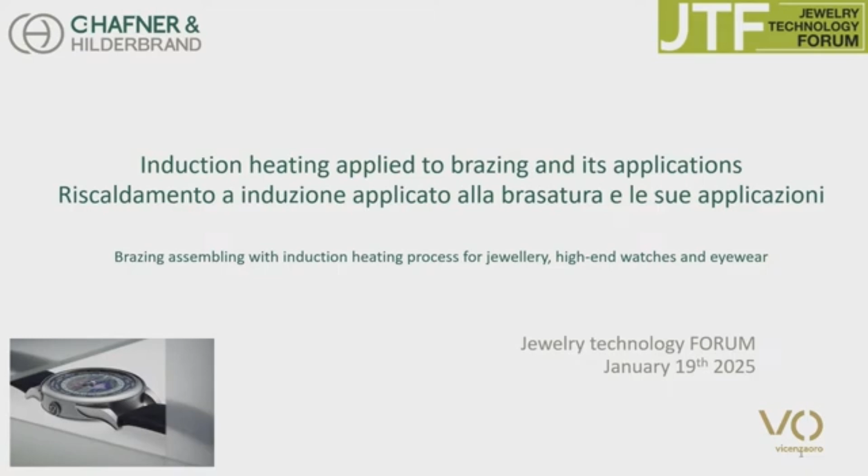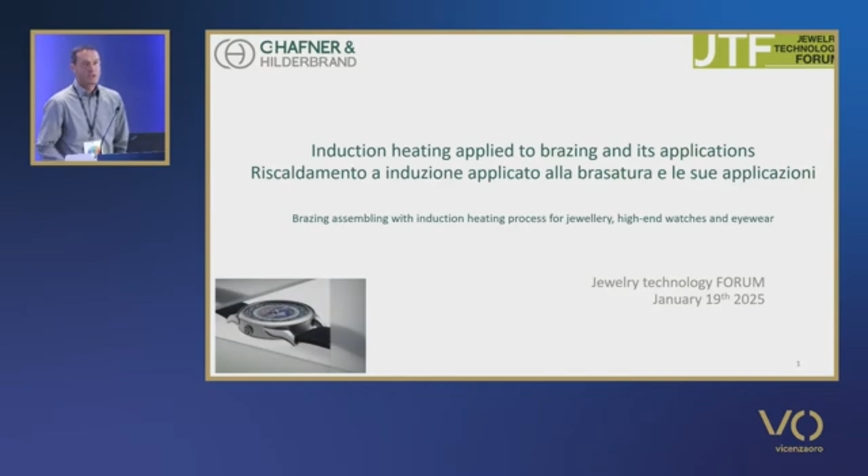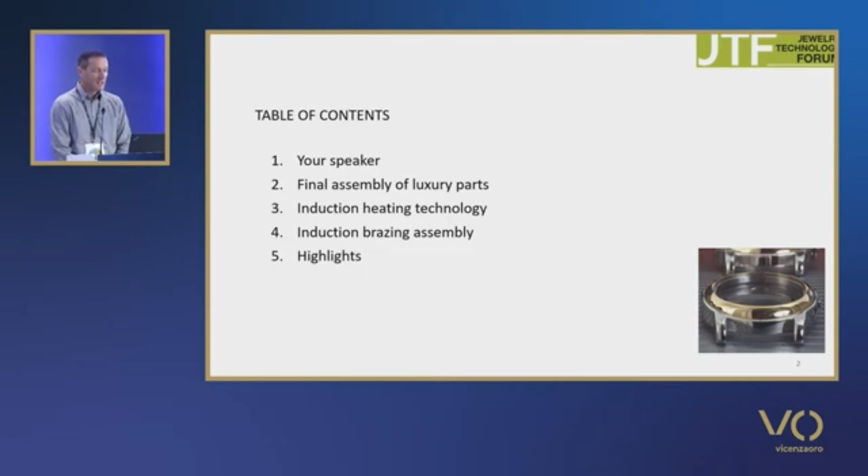Last year, during my previous visit to the fair, I was surprised to see that induction heating is very poorly represented, although it has considerable industrial importance. My presentation is divided into 5 parts. First I introduce myself, then I show you the requirements of final assembly for luxury parts, then I present the induction effect, and finally I merge assembly for luxury parts with the induction effect. At the end, you have to remember the highlights.

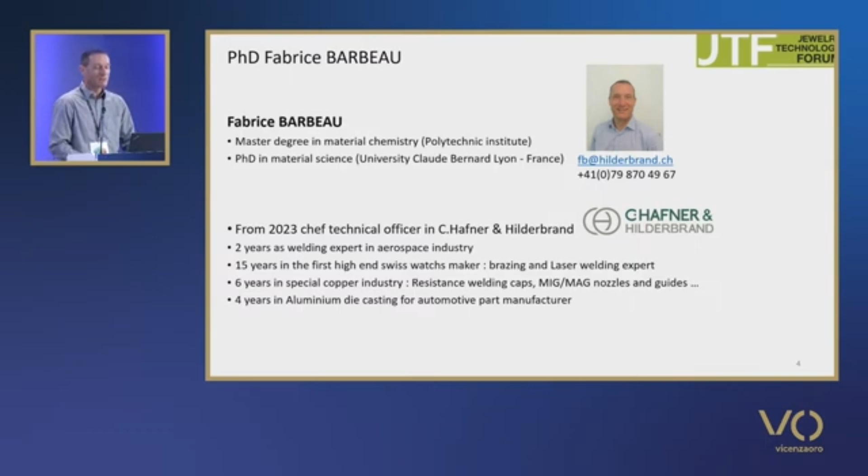So myself first, I just apologize for my lovely French accent. Shortly, I have about 30 years of experience in welding and brazing, including 20 years in the luxury sector.

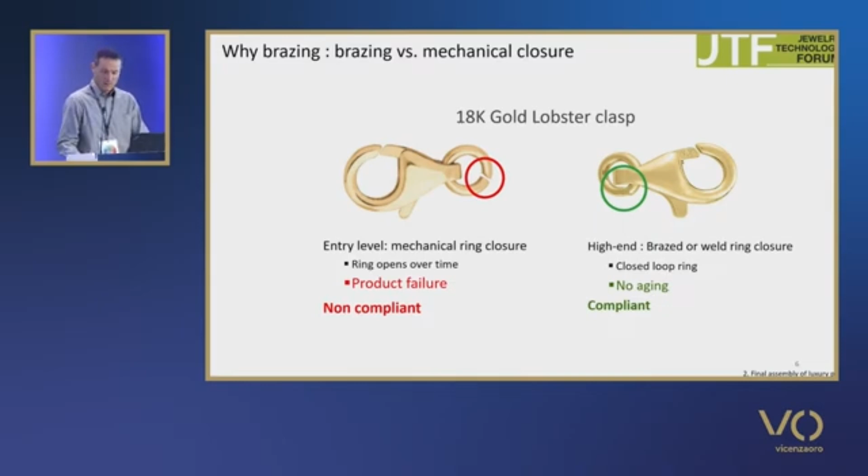There are two ways to create a completely metallic link: brazing and welding. For welding, only laser is compliant with luxury requirements due to small pieces and very high precision. In laser welding, the laser ray melts locally the two different parts and creates a definitive link. For brazing, the key point is to insert a low melting alloy, not too low, and during heating the low melting alloy creates a definitive link for assembling the two components.

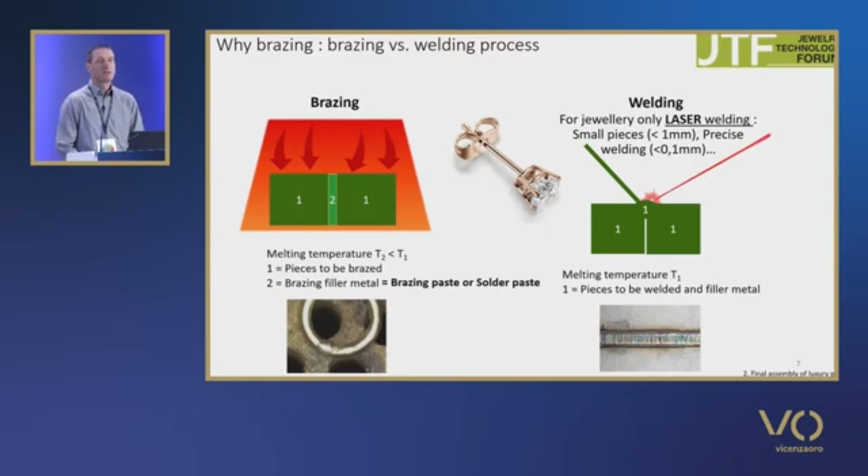I want to insist on the wording. What we have to clarify is, what is it, solder paste or brazing paste? According to the standard, the term soldering, also called soft brazing, must be used for assembling with filler metal at a temperature under 450 degrees. For instance, when using tin-based filler metal for assembling electronic components, it is called soldering, and the filler metal is called solder paste. The term brazing, also called hard brazing, must be used when the assembly is carried out at a temperature above 450 degrees. It is always the case for luxury goods. Subsequently, only the term brazing paste will be used.

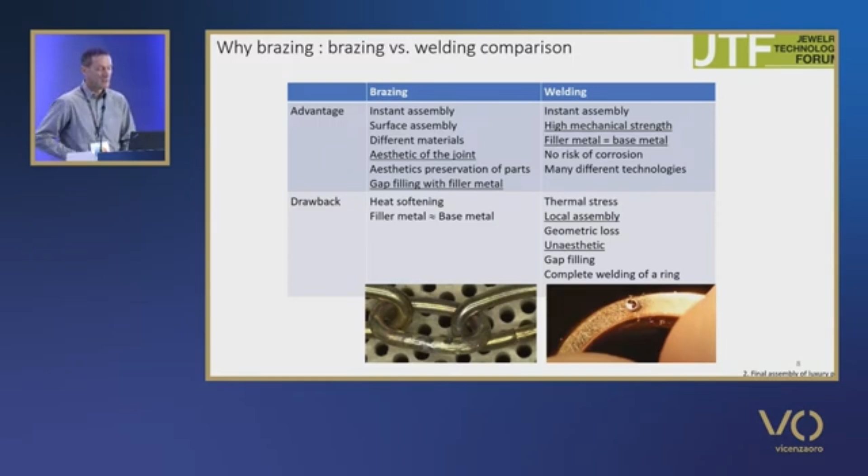Welding is very interesting for very high mechanical strength, and it is possible to use a filler metal with exactly the same composition as the base metal. For brazing, the key point is the aesthetic of the joint. So welding involves very, very local heating, and thus has an affected zone. Welding is very interesting for repairing. Brazing, with its very high quality and the possibility to braze the finished part, is perfect for first production.

Looking at the brazing overall process, there are some subsequent operations: machining, deburring, washing, and you have to pre-assemble the components and dose the filler metal. The heating process of brazing can be performed by a furnace, torch, or induction. The next steps are finishing, grinding, and so on.

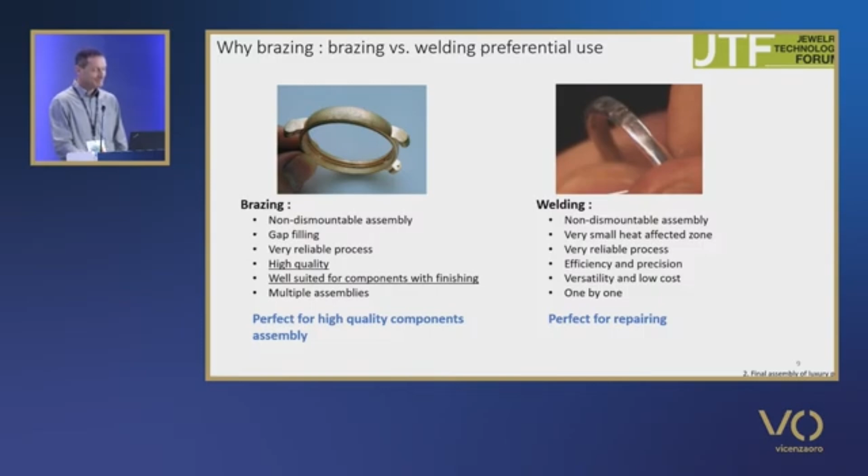The brazing filler metal requirements.

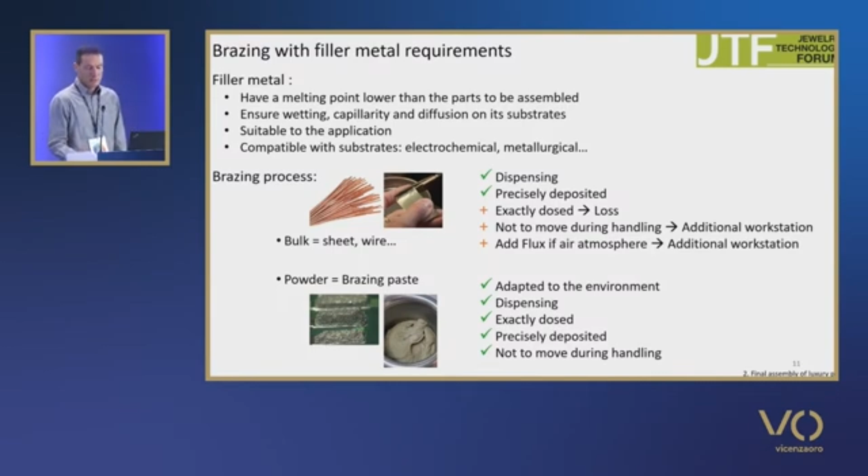The key points for filler metal are melting point, which should be as high as possible, but not too close to the component's melting point, and suitability to the application, meaning the right metal fineness, for example 18 karat gold, the right color or the closest color possible, and the mechanical requirement for luxury goods.

What is brazing paste? A brazing paste is a mix of a flux, a binder, and a powder metal. The flux has a first shielding effect on the components, and when it completely melts, it creates a deoxidation in order to protect the filler metal. The binder allows the powder to be packaged and dispensed. So brazing paste is an all-in-one, ready-to-use product.

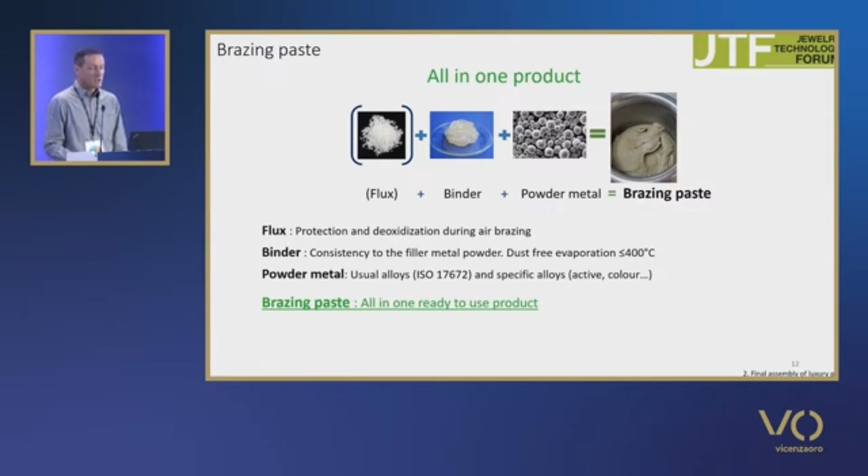Some key points about the brazing paste. First, I insist on the color. On the right, you can see the CIELAB diagram that presents the three basic colors in a board. As you can see, 4N and 5N, pink and red golds, are on the right, and traditional alloy, used in bulk way, is quite far from the real color.

A key point with brazing paste is that you can create a very fine alloy that is very close to the regular color of 4N and 5N. For the Hilderbrand binder, it contains no water, so it's not drying. The brazing paste is compatible with main heating processes, such as induction or torch, and brazing paste is very easy to dispense.

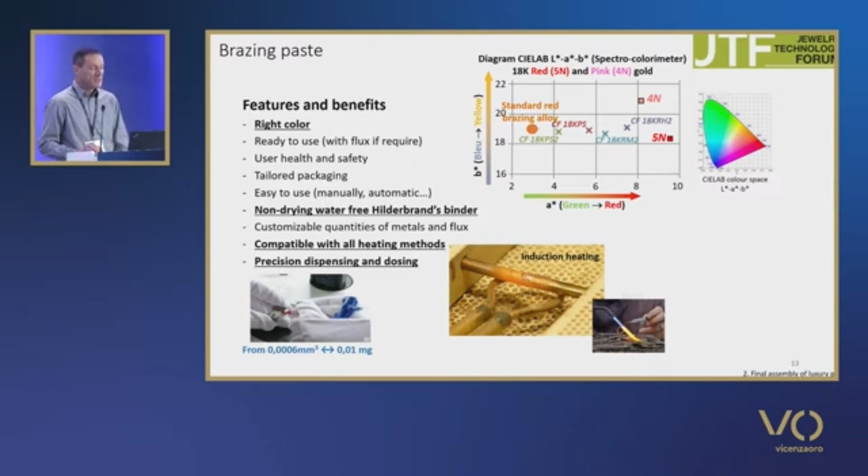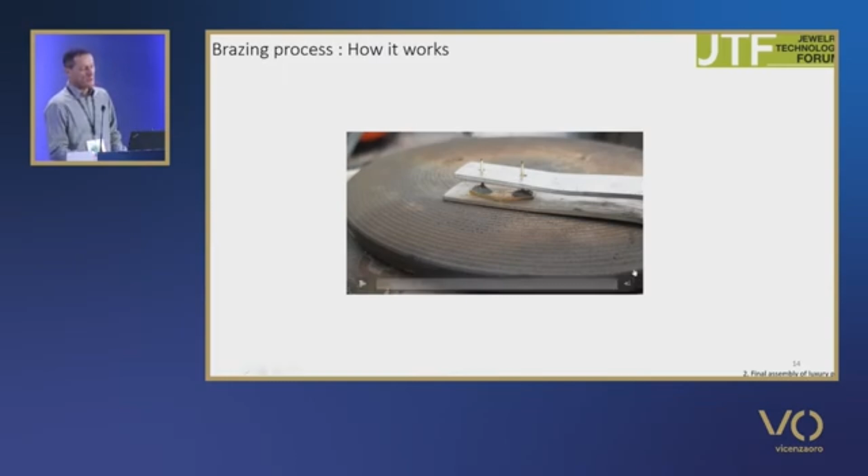I don't know how to start the video, so I just made a short overview of the video.

So first, the binder evaporates. Second, the flux melts, and third—not precisely, but—the metal flows, as you can see. So: evaporation, flux melting, and metal melting.

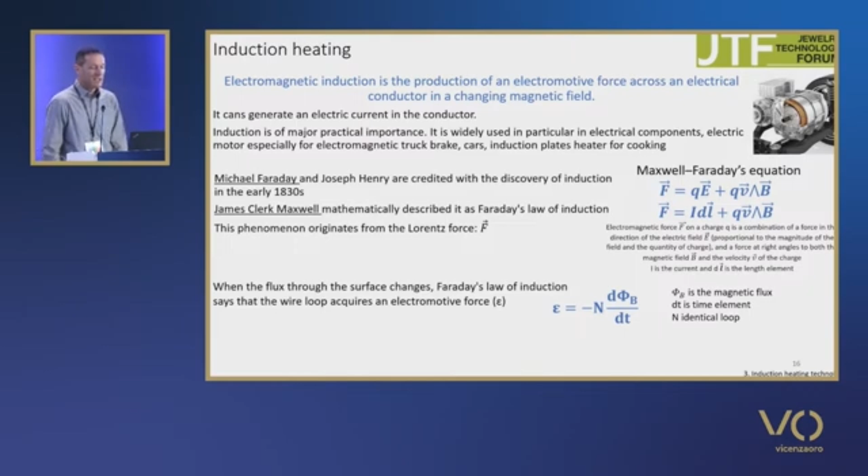Induction heating. Michael Faraday is credited with discovering the induction effect, and the mathematician James Clerk Maxwell put the effect into equations. We just have to remember that Maxwell's equations link magnetic field with electric field and electromagnetic force, and it can lead to electromotive force.

With the equation, you can calculate the power of the induction effect and the thermal efficiency. But in everyday life, what does it mean?

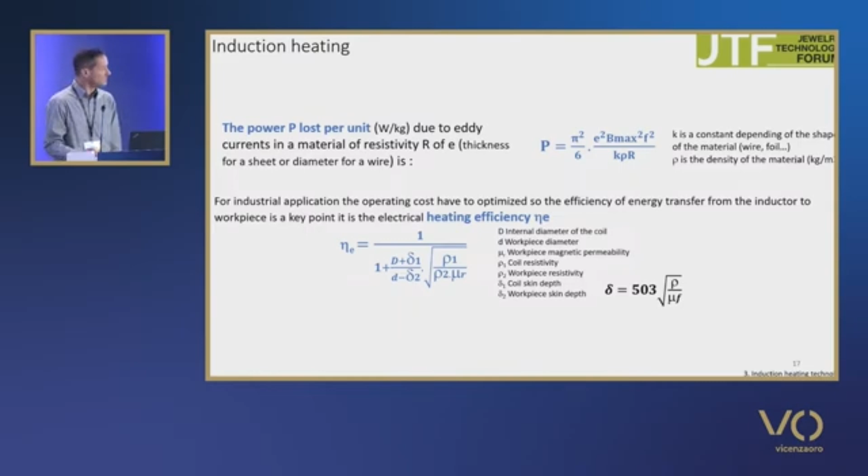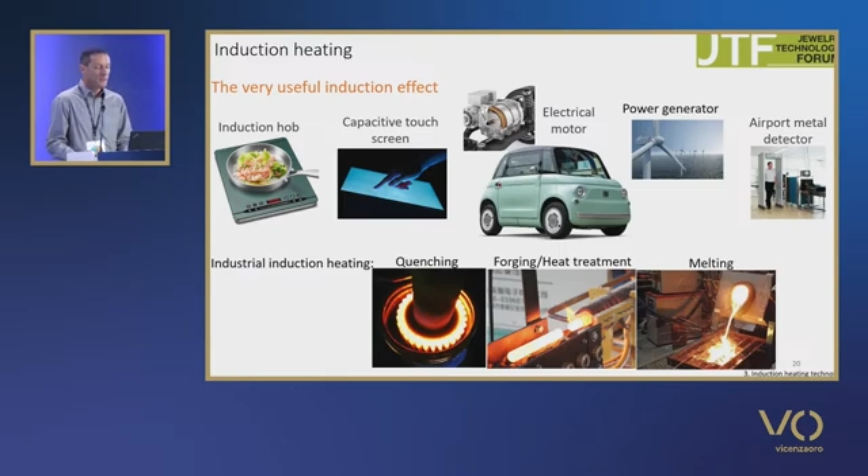Many people use induction for heating their morning coffee using an Italian coffee maker. The well-known Italian chef Massimo Bottura uses an induction hob. The induction effect is widely used, as shown in induction hobs for cooking, but also in capacitive touchscreens, electrical motors, power generators, or airport detectors. In industry, in a metallurgic plant, induction is used for quenching, forging, and melting.

What is really the induction effect? When you move a magnet near a coil, it creates a current, and by reciprocity, when a current flows in a coil, it creates a magnetic field. If instead of a continuous current you use an alternating current, it creates electric and magnetic fields.

And by reciprocity, electric and magnetic fields in metallic materials create an alternating current based on eddy currents. The heating from the induction effect is done by the Joule effect on the eddy current.

As shown on the induction hob, the induction coil creates a magnetic field. The cookware is based on iron materials, which are sensitive to the induction field, so an eddy current is created, and the heating effect appears. Thanks to this eddy current, it is possible to heat a conductive piece without contact.

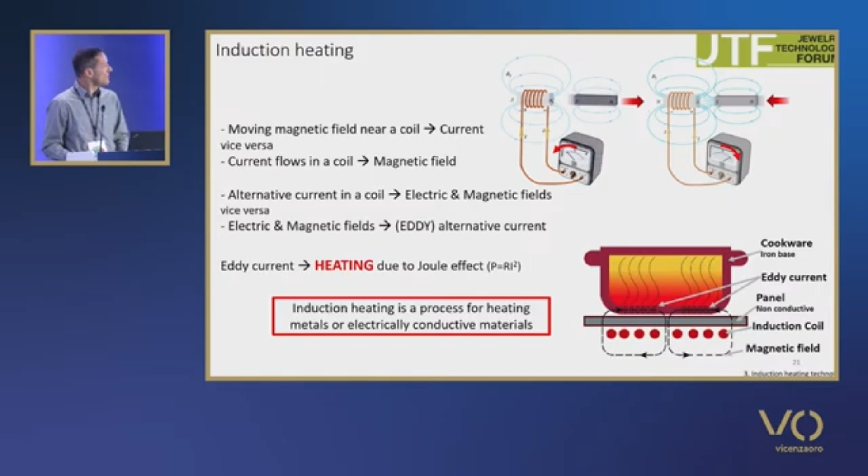Second, the greater the applied current, the greater the eddy current, resulting in a greater temperature inside the product. The induction power only works on conductive materials. So, for instance, egg cooking only happens on the metallic part, because electric and magnetic fields do not penetrate conductive materials deeply.

There is a skin effect, and the induction heating power is linked to the frequency.

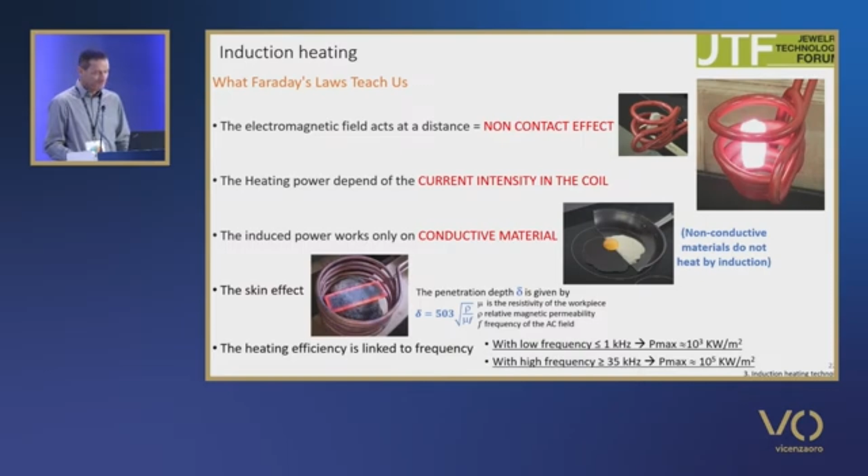In reality, induction tools are quite easy to make. You can do it yourself, and the starting point is a single wire loop. And in technical terms, you multiply the effect by n.

As I explained, the induction effect acts at a distance, but it decreases very quickly with distance. So the coil has to be as close as possible to the heating zone.

The induction effect depends on the materials. Stainless steel, titanium, and graphite are very good candidates for induction heating. The poor resistivity of gold and silver is a problem, but since they are very high density materials, it is possible to heat gold and silver metal.

In this table, I show you PTFE, Teflon, quartz and alumina. They are widely used in holding and enclosure systems for induction. Due to their very high electrical resistivity, they are not affected by the induction effect.

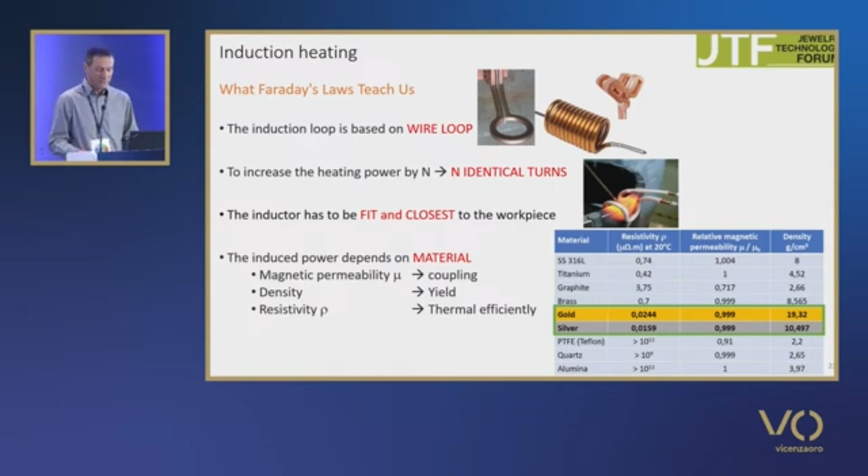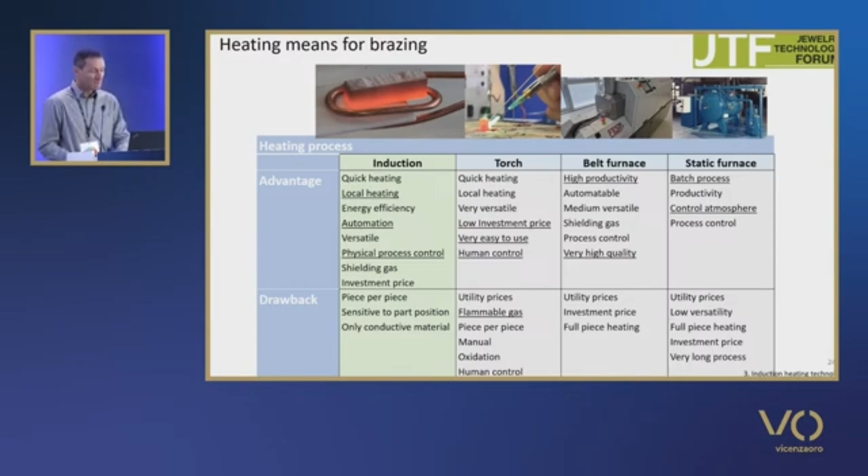So induction is a very local heating. It is quite easy to automate, and it's a physical process that's easy to control.

Now, the first tool for induction can be done by yourself, easily with the hand. This is, as I explained, a very reproducible physical process, and it's a safe process. No flame, no gas. A brazing paste is an all-in-one ready-to-use product, very easy to dispense and dose.

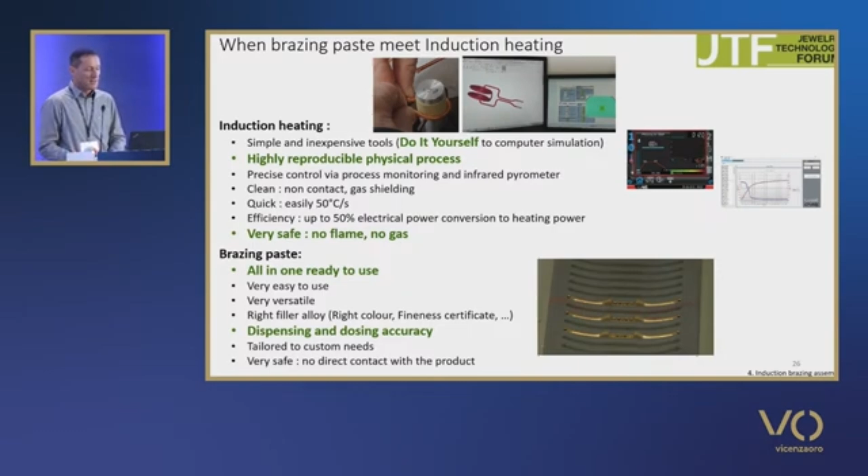So the basis of the induction setup is a power generator, an induction coil, and a ceramic jig, and if you need, you can add shielding gas.

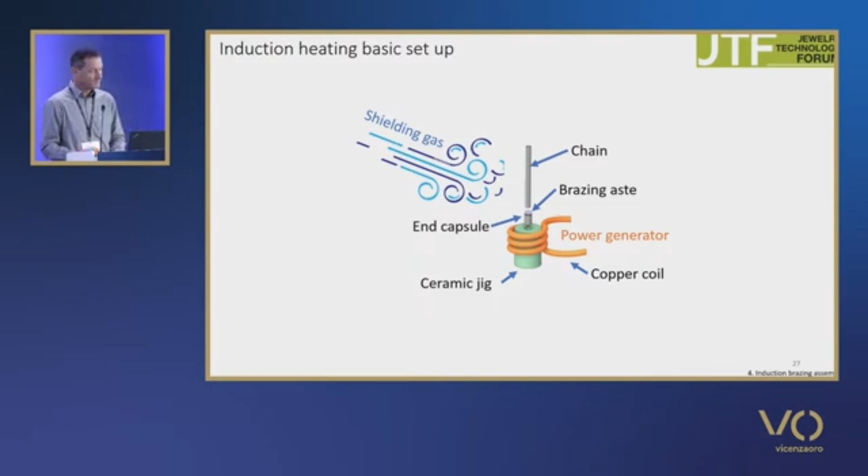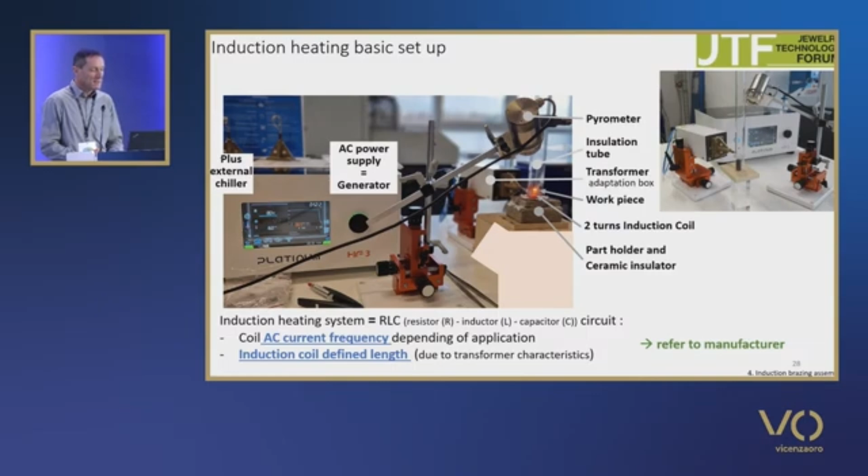There are some key points to refer to the manufacturer about the AC alternative current frequency and the induction coil length.

The induction brazing assembly starts mainly with a holding tool, pre-assembled with induction, laser dot, or resistivity pre-assembling. After that, you have to dispense the brazing paste, put it in the holding tool, then heating and cooling.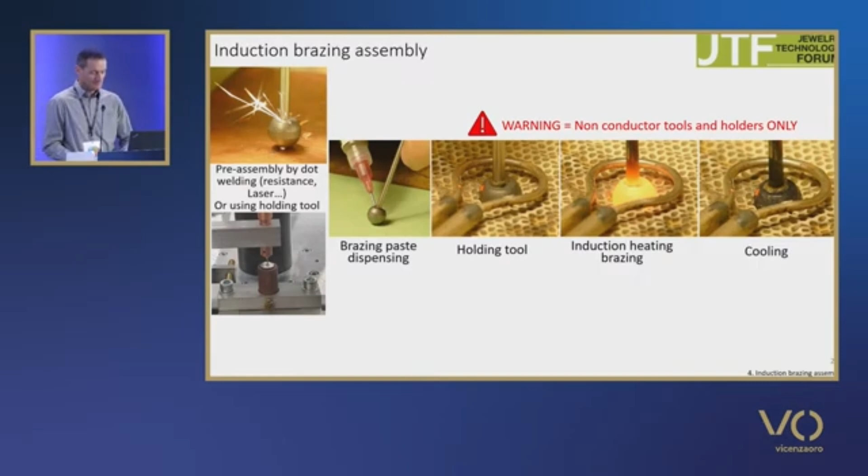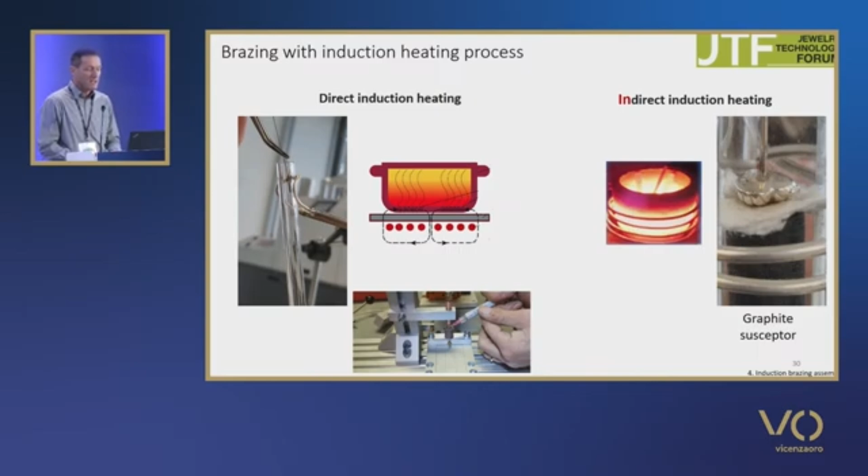There are two ways of induction: direct induction heating, where you put the components closest to the induction coil, or indirect heating, where mainly you use a graphite susceptor.

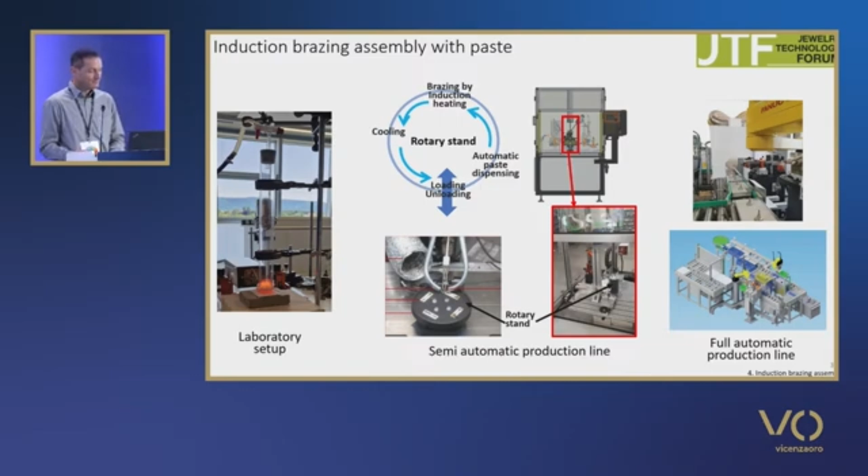Some examples of high-end luxury: many bracelet clasps are brazed using induction heating to achieve only local heating. The well-known lobster clasp...

Sometimes there is a spring inside, and the spring is very sensitive to temperature, so to avoid softening, induction heating is very interesting.

The bracelet ring is a good candidate for induction heating because it avoids heating the bracelet a second time, with the risk of the appearance of orange peel or something like that.

In high-end eyewear with full metallic frames, there are some pieces that are widely brazed using induction heating.

In a watch clasp, the pin can be welded with induction heating to avoid heat-treating the clasp, and some high-end watchmakers insert gold parts into full stainless steel bracelets.